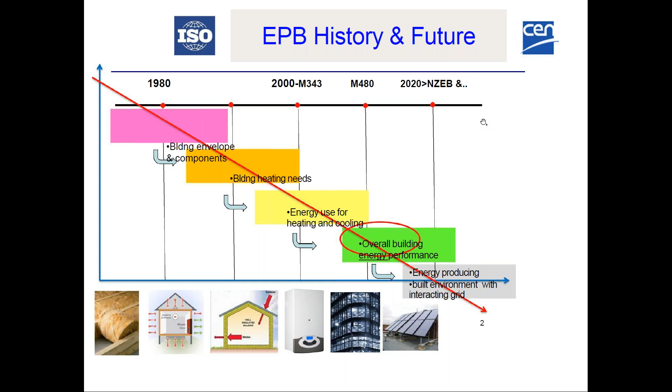This is, you could say, history, and the current consistent set of standards to assess the overall energy performance of buildings is there to support on one side the directive, but also to show what is the content of the energy certificate and how to check compliance against minimum energy performance requirements included in the national regulation.

Harmonized procedures, but flexible for national situations, as a basis to give customized energy advice to renovate the existing building stock, because that is really the focus that we should look at. And the holistic approach, as said before, where we go from boundary conditions and product data to energy need and energy use calculations, and finally expressing the energy performance of buildings in a transparent way.

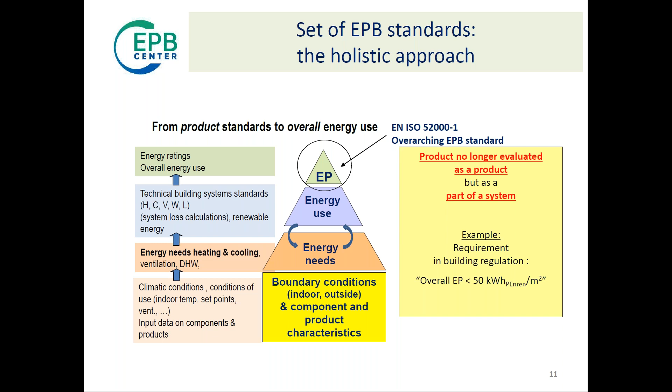The set of standards, 53 standards, to assess the integrated impact on the energy performance of buildings, covering all systems, heating, cooling, ventilation, domestic hot water, lighting, and the impact of building automation and smart controls, also covering energy using and renewable energy producing appliances, and respecting the indoor environmental quality requirements.

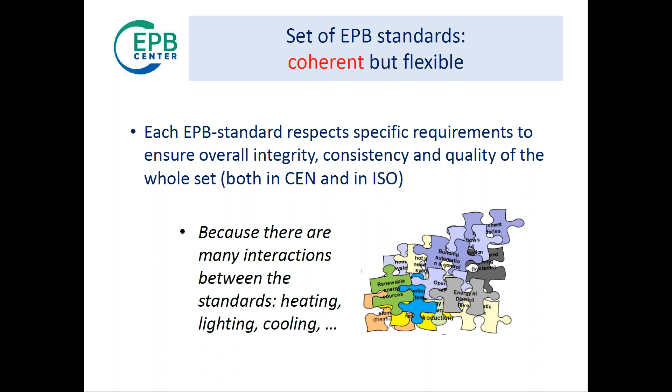This set was published in 2017-2018, and it is a coherent set that will be also explained later, but it is really a set that works together. The inputs and outputs are very well defined. And, that's very important, they are flexible to take into account the national legal context, the building tradition, the climate, and the building use. And we address this by an Annex A/B approach.

The EPBD requires member states to express the energy performance in kilowatt hours per square meter per year. This is addressed in our standards, and also encourages the member states to include the connected greenhouse gas production. The methodology we prepared in the standards is transparent and open for innovation.

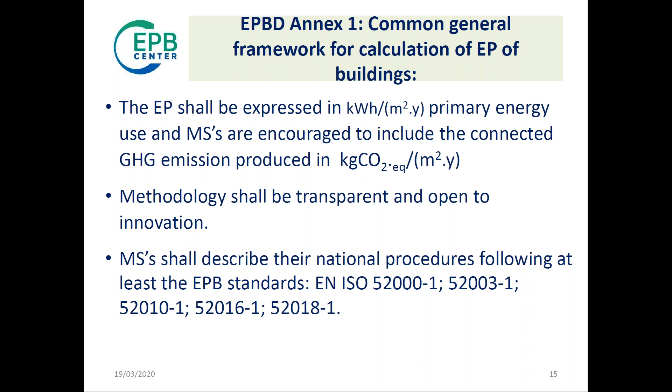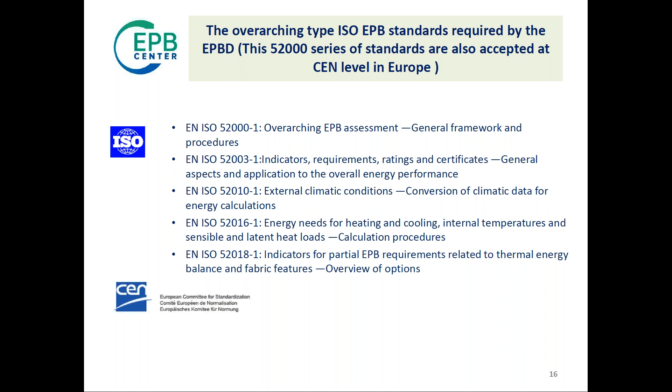Member states shall describe their national procedures, if they don't use the standards itself, according to these overarching standards. At least these 5 standards have to be respected, in the way that they have to report, based on the annexes of these standards, how their national procedure is working.

Flexibility is achieved by having in the standards this Annex A-B approach. Annex A has a template for choices and input data, an empty table. Annex B has informative default choices and input data that could be used, for example, for voluntary EU certification systems or other demonstrations of how to use the standard.

In general, it is expected that choices, levels of simplification and input data related to national building regulations may differ for different types of buildings; existing and residential versus non-residential will have different levels of simplification. For new NZEB buildings, we have more data, so there could be less simplification. The use of EPB assessment for deep renovation towards NZEB also gives reason to develop special annexes for renovation projects.

My conclusion is that this modular, transparent, unambiguous but flexible set of standards is an important instrument to support the proper implementation of the EPBD in the European member states. It supports and defines the nearly zero energy approach, and supports the future decarbonization of our building stock by 2050. The flexibility, of course, respects local climate, national legal frameworks on definitions and levels of simplification, building traditions, building use, and energy infrastructure, as the building is part of the local grid.

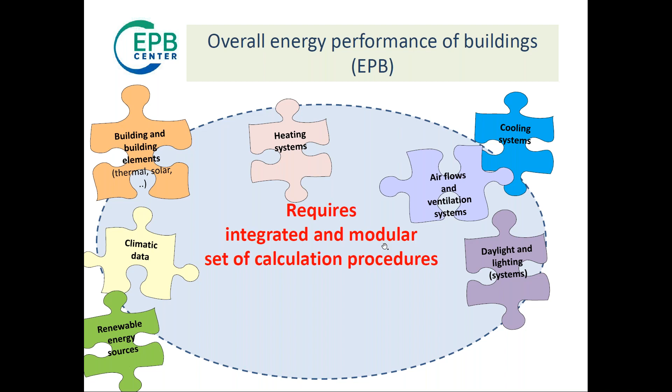So these are just a few pieces of the jigsaw puzzle, and here you see some others. I will not read them all aloud, but there are several which are on the core of the calculation procedures and others which are more on the boundary of the procedures.

And you end up with all these pieces of the jigsaw puzzle, and these all need to fit nicely together to form a complete puzzle. And that's what we try to create.

I could add to this that the core of the EPB calculation method consists of only a handful of EPB standards, and I'll explain a little bit more in the next slides.

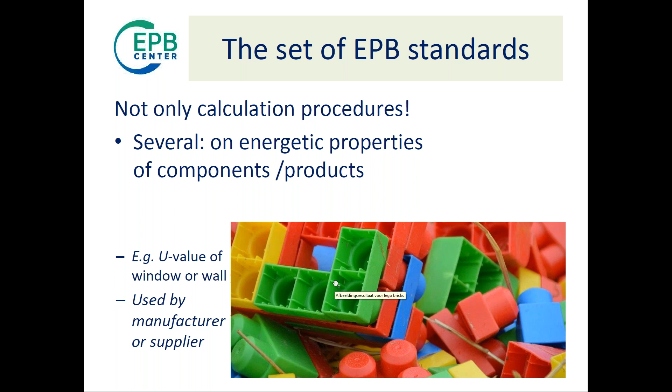Then you have also other standards dealing with, for instance, boundary conditions. So take the climatic conditions or the standard conditions of use in the building. So then you have to think about the temperature settings for the different types of buildings and spaces, or ventilation requirements. And again, these are usually not to be dealt with by the practitioners, but these are fixed by the national regional regulators. So you only, as a practitioner, need to know the output.

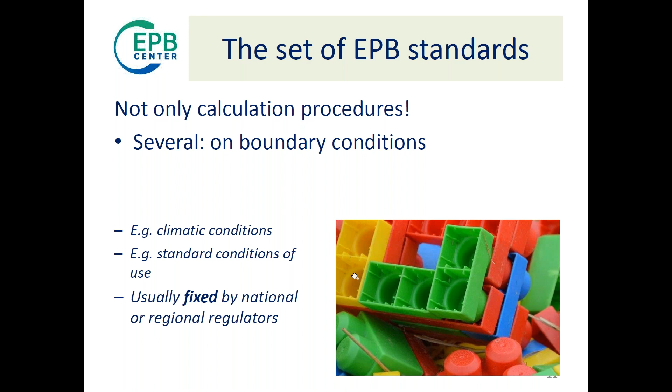And finally, you have a number of EPB standards which are on special topics. For instance, guidance on inspection of systems, or economic evaluation procedures, or system requirements like requirements for the design or the sizing of a system, and also on measured energy performance, which is important also in the context of getting a reliable energy performance. Then you have also standards which contain reference procedures, so they form the basis for other EPB standards which are for more practical use.

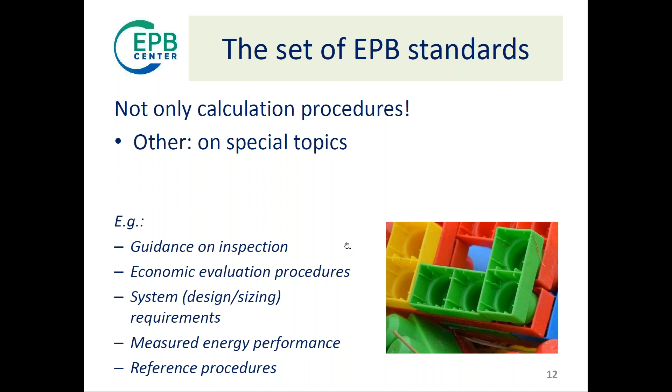So we can conclude that the set of EPB standards includes many standards that are not needed for practitioners when they want to assess the energy performance of a specific building.

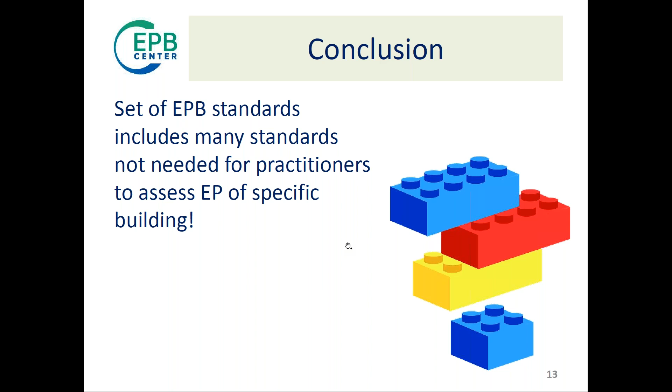Actually, there are 5 EPB calculation standards, and you might recognize this small pyramid that Jaap also showed. So let me start at the very top.

Actually, the whole set of standards is guided by EN ISO 52000 Part 1, the overarching EPB standard. This standard comprises the EPB framework, so it contains common terms for all the EPB standards, a modular structure. But it also gives you the rules to calculate the overall energy performance.

And to get to the overall energy performance, you need to collect all the energy uses from the systems, and then you have to convert these to primary energy and CO2 emissions.

So as I said, that standard requires the use of standards on the energy use. These are actually several standards dealing with the different services, ventilation, heating, cooling, lighting, and so on. And then many of these standards are subdivided into different parts, covering different subsystems or components, or very special systems like heat pumps or combined heat and power.

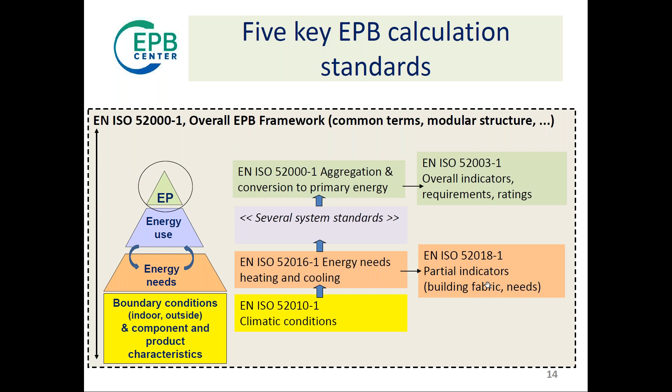Moreover, these are detailed calculation procedures. That's true, but in practice, if you have detailed calculation procedures, you use software tools in which all the algorithms are embedded.

So for practice, you don't need to worry about all the details of these calculation procedures. And moreover, the number of input data is not proportional to the complexity of the calculation method. Just as a tip, the webinar in May 26 will deal with the hourly versus the monthly calculation method. There it will be shown that for the hourly calculation method, you don't even need more input data than you normally use for the simplified monthly method. So the number of input data is not proportional to the complexity of the calculation method.

And also, if you look at the number of input data, most of the input data are on the building envelope. So how to get to the U value of your windows, of your walls, of the roof and your floor. This is nothing new, because since the 70s of the last century, we have these standards which deal with the overall thermal insulation level of a building and similar aspects. This is quite traditional, this requirement to have all this input data.

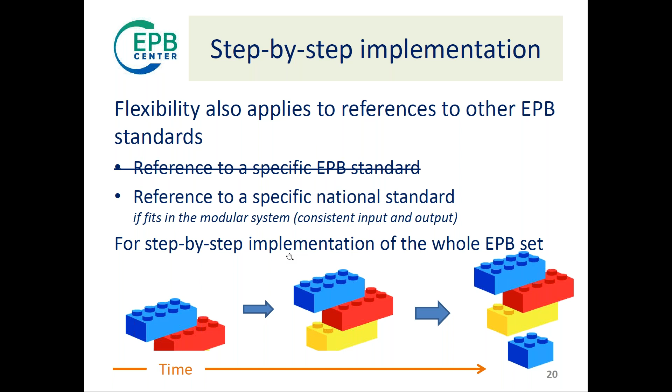So is it all really that simple? Well, of course, life is not that simple. Nearly zero energy buildings ask for novel technologies, and they should be designed, operating, and interacting correctly under time-varying low energy use conditions. So this is a challenge, and such a challenge cannot be avoided. You have to have a specific level of expertise to design a nearly zero energy building.

And as I said, you may want or need to use specific technologies to come to a nearly zero energy building. And then you also need special standards on these special techniques, which might be a little bit more complex than I might have shown to you before. On the other hand, the more complex your building, the more complex the calculations will probably be, because you have more technologies involved and more input data. On the other hand, you should be careful, because a simple building designed to reach nearly zero energy building level may not be that simple after all.